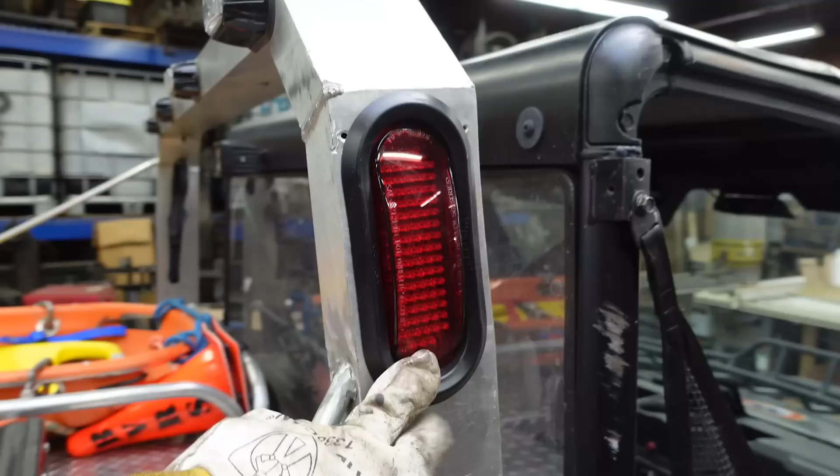All right, so here we are, day 1 on the UTV roll cage project. And I'm gonna start with a little disassembly and some tear down, pull all the stuff off the back of this thing, remove the placards that I need to, start working on pulling the lights out of the rear bar here. We gotta pull these top 4 flashers out and these side flashers out of here. And we'll chase the wiring, all the wiring goes over there to that side. And then we'll cut some stuff off and grind it smooth.

We gotta cut all this off here. This is already coming off because they hit up here with a tree. So that'll come off. The middle divider here is gonna stay, but everything else is gonna come off. This side rail here is gonna come off. And we will make an angle that sits here that will allow our steel cage to interface with the aluminum box because it's got to bolt together - you can't weld aluminum to steel. So yeah, here we go, we're gonna start with some disassembly.

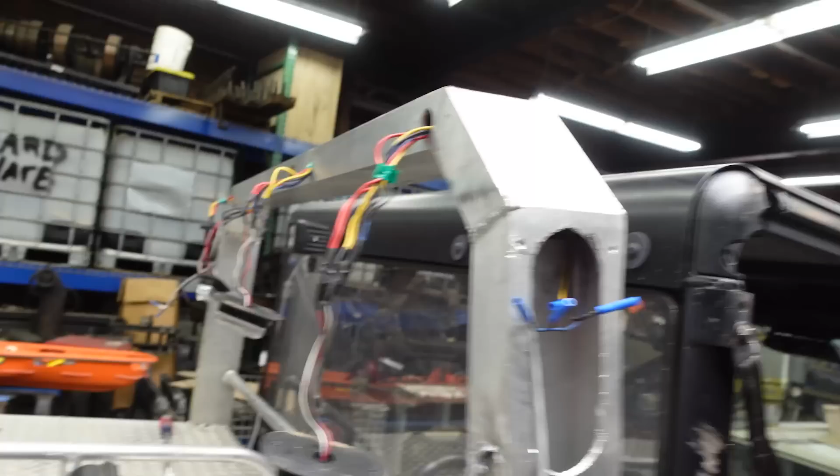Got the lights pulled out. Everything was crimped and or soldered, so I'm gonna have to cut these wires and then solder them back together later, it's no big deal. We've got a circuit that runs these side flashers, and then we've got a circuit that runs these rear flashers. Looks like they were ready to add another light here, but they didn't. No grommet to protect the edge of these sharp holes, so that's interesting - this is how they did it. But we'll get the lights yanked out and coiled up over there, and then we'll cut this thing off.

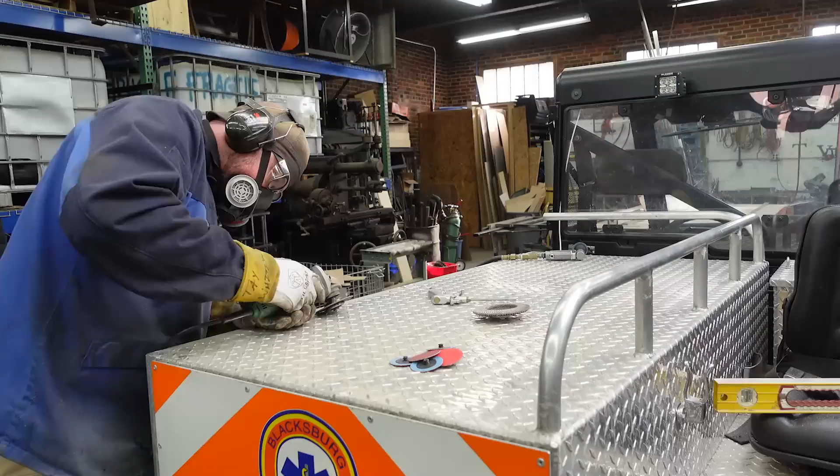So I found some 2-inch angle in the rack, and this is the plan as of yet. This one actually fits perfect, I don't even have to cut it. But because there's doors right here, we're gonna let this angle sit up like that, leaving this web of the angle here versus just doing a flat bar. We'll add some strength, and this is where the stretcher slides, so if anything it can maybe act as a guide as the stretcher slides in here.

So that'll be nice, and then our tubes for the cage will sit here and be welded right there. On this side we don't have compartments, so we can flip the angle down and weld our tubes here. And these angles will be bolted to the box, so we'll through bolt in a few locations, and that will give us a steel base that we can start fabricating our steel cage from.

But yeah, everything's stripped down, got all the old stuff off. Looks good. This guy here was welded to the upright, so we're gonna use one of those bends and cut this back and return it back down to the bed here, because this is where they clip on the top of the basket here. So this has to stay.

We'll just take that elbow and kill it right here, cut this back. I'll probably do that first while there's nothing in the way. But I'm gonna clean these guys up. I'm gonna weld shut the holes that are here from whatever this was used for last, and then figure out where to make our holes for bolting. Figure out if we're gonna have an issue in here. Nah, we'd be all right, there's enough space for a bolt to live in there.

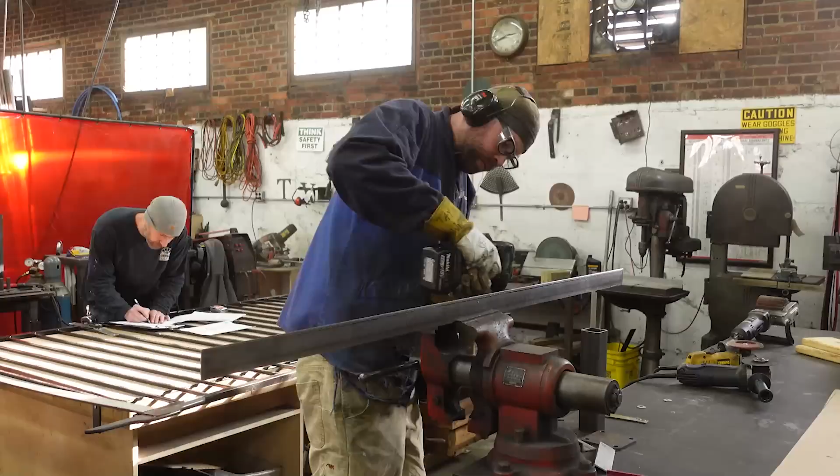So there are base plates. Just went ahead and did a nice little chamfer at the end, clean it up. That one's gonna live there, and then this one's gonna live right here. Cut it to contour match that slope, wire wheeled it, cleaned it up. It's ready to weld to.

Pretty close getting these on. Once these are on, it's time to shift gears and do some tube bending, start laying out our main hoop. Good progress, slow but sure, want to get everything right the first time.

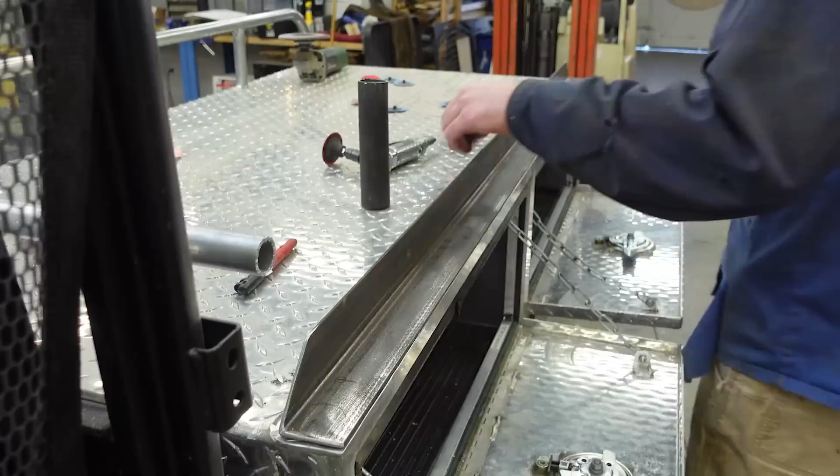Okay, quick update. The end of the day, it's a Friday, so I'm probably done here, but it's what we got. So we got 2-inch angle bolted to both sides. This side, the angle's up. I had to push these fasteners back from the midline because I had to dodge some stuff that's under here, but I got all 6 of the fasteners to connect and be bolted down. So this is for sure not going anywhere. They might as well consider that part of the structure now.

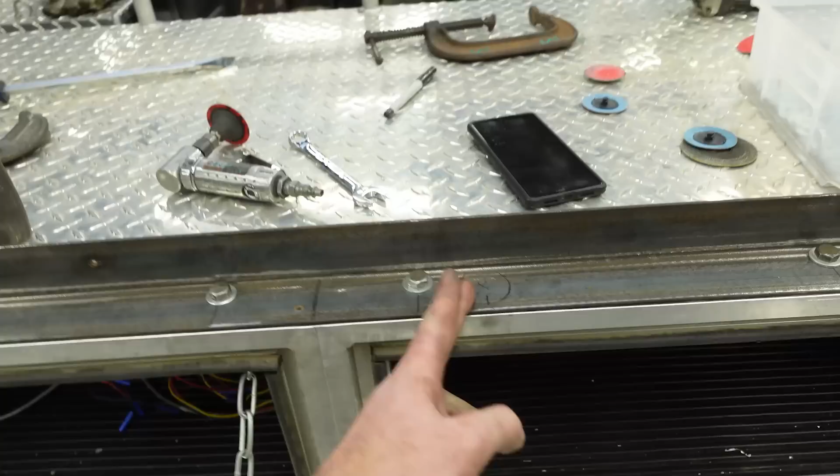And so I'll have the front hoop is gonna be here, and then 36 inches back, the rear hoop's gonna be here, and those are 2 main hoops like you would have in a normal car roll cage. And then here's an intermediate vertical that'll be solid panel here, expanded metal over here. So I got all that mapped out, everything's looking good.

And then on this side, we got the same deal. We got 3 bolts in the top, 2 bolts in the side. The angle is down because I didn't have anything in my way. And we'll have the rear hoop here and the front hoop here. So now I've got a steel foundation onto which I can build my steel roll cage that all bolts to the aluminum bed. You can't really see a difference right now, but that was a lot of valuable prep work.

So now we can just start motoring. Next week, I will be mapping out my hoops, setting up my bender, and hopefully not wasting a bunch of material bending it wrong. But I have yet to do a main hoop. I've done 2 roll cages, but I bent everything except the main hoops because I got those pre-bent. I know how to do it, I know the math, I know how to measure it. I've just never done it.

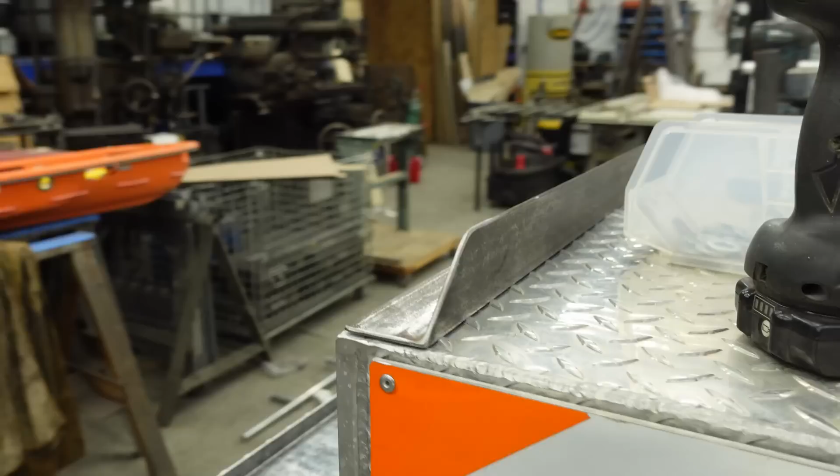All right, hello everyone. Update on the UTV roll cage build before I get stuck into it here and start bending some tube. I've got a few things to figure out.

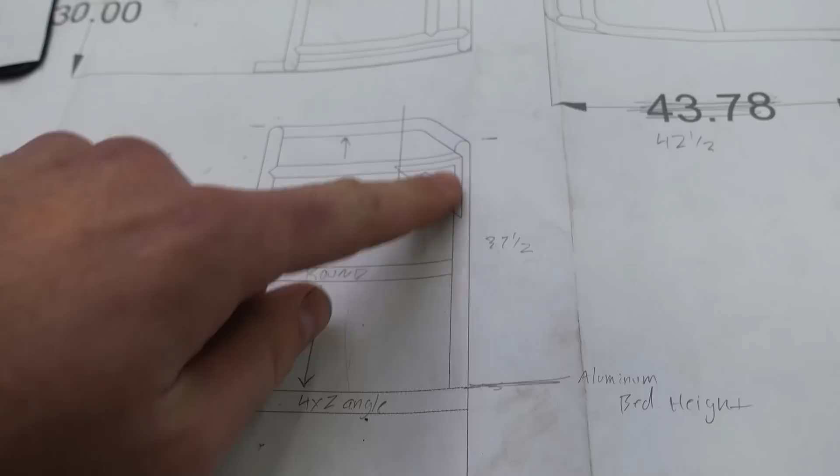So we'll have our front hoop here. If you imagine the cab's right here, the front hoop's here, and then the top bars go up and back to a taller rear hoop.

I think geometry-wise, I'm gonna do the same, just the rear hoop will have longer legs. But we're not gonna do a perfect square. We're gonna do like an 80-degree bend here, and then it'll be slanted until about here, and then it'll do the rest of the 10 degrees and come back in, which is sort of pictured here. You can see how it comes down, it's still slanted, and then a little bend here that straightens out the leg.

That is to keep the top corners of the cage inside the boundaries of the cab, because with the last one, they were having issues where these corners were sticking out past, and when they're going through the woods, trees and things, you can see rub marks and everything. Tree branches would be going down here, and then they'd catch the main hoop. So we're gonna keep the main hoop inside the footprint of the cab here.

This is a trick I learned from Justin over at the Fabrication series on YouTube: put tape at critical points on your chassis to mark. It helps you measure things out.

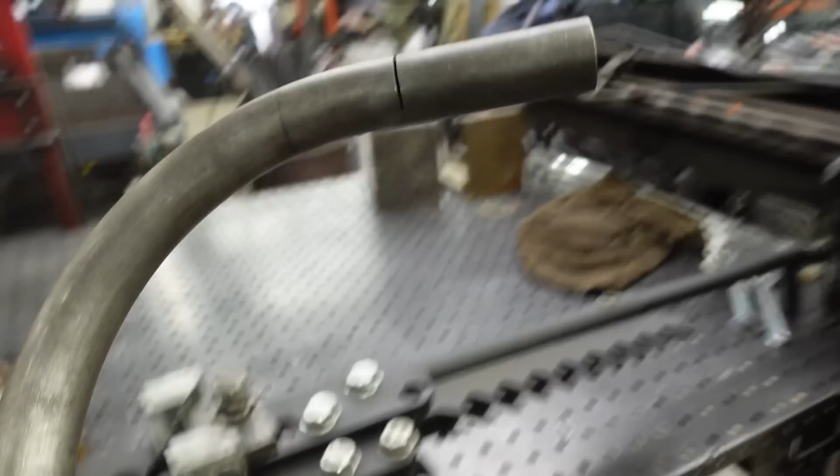I'm using a JD Squared Model 32 tube bender today. I've got my 1.5 inch die loaded up. It's like a 6.5 inch centerline radius. A long time ago, I bent this 90 with this die, and I marked that cut right there corresponds to the front edge of this die, which is a nice measuring spot.

So the reason I did that is I can take this 90 and hold it up to sort of simulate where I want my bends to be, and I can transfer a mark from that line to the chassis, and now I know where to measure, where my bend stops and the straight starts. That's essentially what that line is illustrating for me.

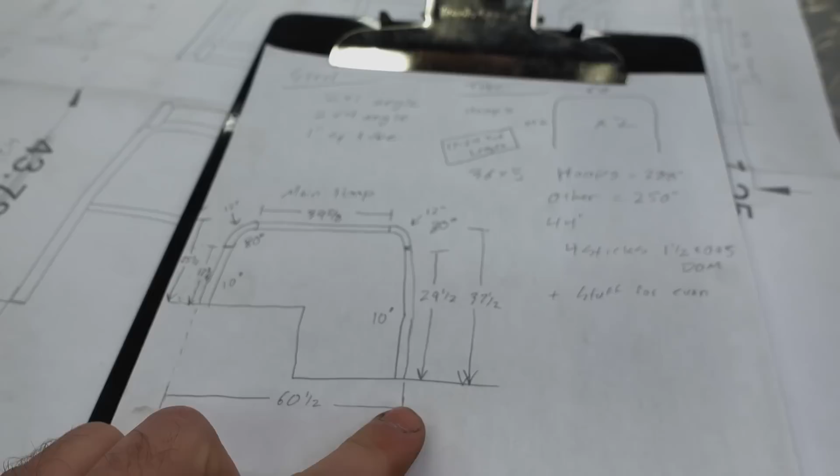The easiest way to do a main hoop is to start from the center and work out symmetrically. So when I cut some of my raw material, I'll work up a total raw cut length based on all these measurements. And then I'll start in the middle and bend outward like this. You make this bend straight, make this bend.

I fully realize that this is a lot of information, so I'm trying to give you the technicals if you're curious about the technicals. At the risk of over-explaining things, I'm gonna get started. I'll try to explain as I go. But really, figure out your raw length, mark your midpoint, all your bend locations, and then just start bending incrementally. Leave a little extra on the ends so you can trim it and fit.

I did a bunch of measuring yesterday. I think I'm ready to start cutting. I may go lay something out in CAD real quick just for peace of mind, but that will only take like 20 minutes. Let's do a few more double checks and then we're gonna get to cutting.

So there is software out there specifically for designing roll cages. I believe it's called BendTech, but I just want to do a 2D layout just to double check some things. So I'm gonna fire up Fusion and just do a 2D drawing of this here.

Just establish some constants and make sure my angles and everything makes sense. I know my bend radius and all that, so we will see. It's a 6.5 inch centerline radius, and I've got some measurements here. This is my roof line here, and this is the bed down here. And now I'm making my roof line.

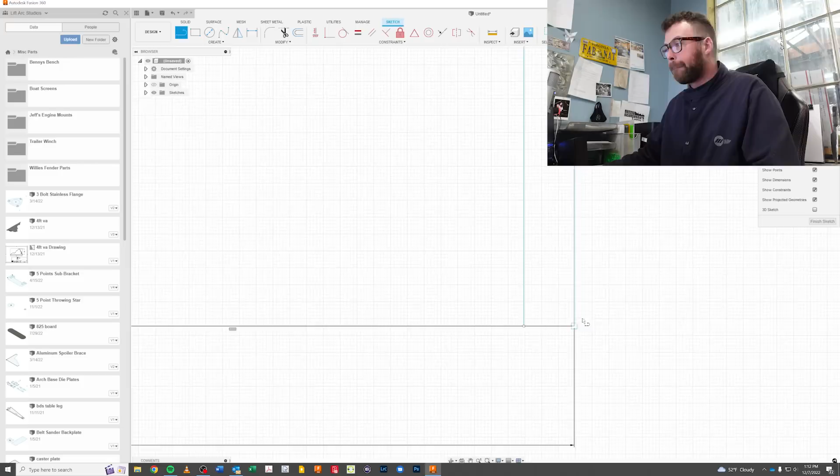So now we can establish our boundaries. Just going in here and assigning some dimensions. So it looks like we want this to be 90. So with these two angles, it shows us what we need to do. As long as from the top horizontal to the side piece equals 90, we can divide that in two pieces however we want.

We could do an 85-degree bend and then a 5-degree bend. We could do a 90 and a 10. I'm kind of leaning more towards a 90 and a 10, but I think I'm gonna lay this out on the table and see, mark my straights, something of that sort. The one thing this doesn't exactly help with is start of my bends and end of my bends, but I can translate that somehow.

So I'm gonna print this out. I'm just trying to be extra careful because this is the first main hoop I've built from scratch, and I want to get it right. I'm trying to use all the knowledge I've soaked up on YouTube and from other people, think it all the way through. So let's go back out in the shop and do some more thinking.

All right, so here's where we're at. A lot of thinking, and now I gotta download this thinking into you guys.

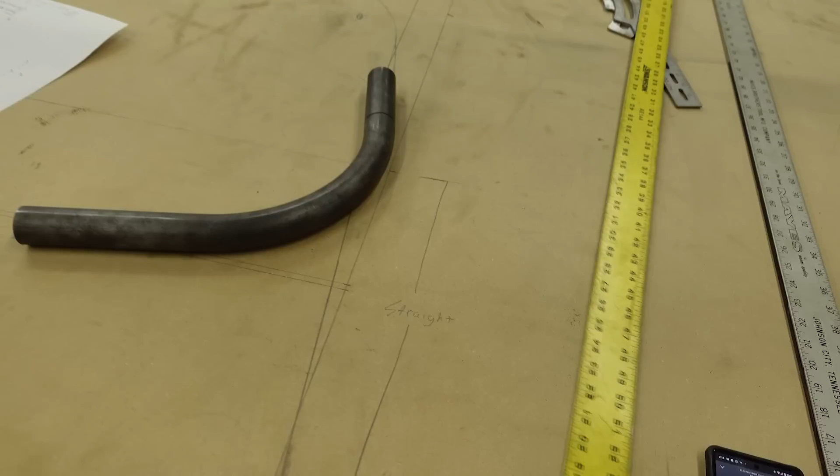So I've mapped out my limits, so I know how high the vertical height is that I can't go past, and then where my top corners are gonna be. I measured the top width of the cab because I don't want my corners to poke out past that. So we establish our constraints first.

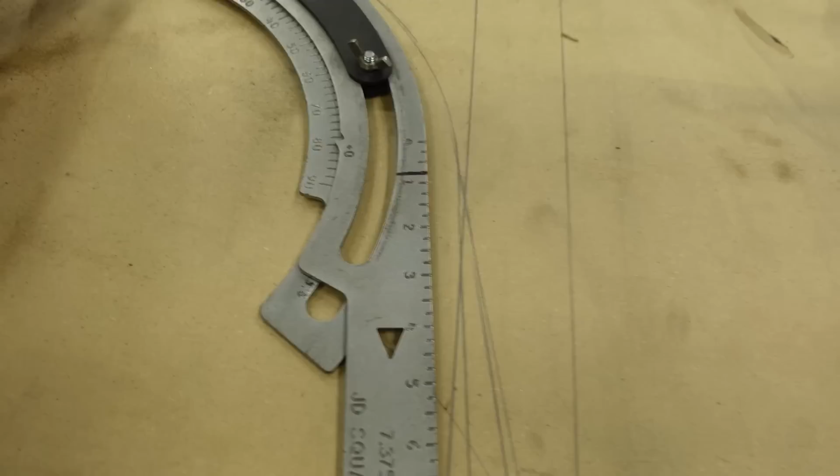Then using this bendicator, clever name for this tool, also by JD Squared. This bendicator is matched with my die on my bender over there. I've marked out where my bend starts are based on this mark here, and I can use this to play with the angle and see where it's gonna telegraph my tubes.

So I want it to be within a certain width up top, but I want it to get wider down here, and I mapped out where I want it to land. So I can use this guy to put my corner in the right spot, but based on the angle, it'll push this leg in different spots, and I can see where that makes the tube end up.

So essentially, I've landed on 80-degree bends here. I know where my start of the bends are, and I know where my midpoint is. So I'm gonna cut a rough piece of tubing, mark my midpoint, make two 80-degree bends this way and that way, and then I'll lay it up on here and double check everything before I commit to the 10-degree bends that will be down here, because 80 plus 10 equals 90, and that'll get me where I need it to be down here. That makes sense?

You follow, Steve? Oh yeah. Oh yeah. 80 plus 90. 80 plus 10 equals 90. Don't do that to me.

Okay, so I'm gonna go calculate a rough cut length for my raw material based on my 3 legs, and then I'm gonna cut it long, and then we'll start bending.

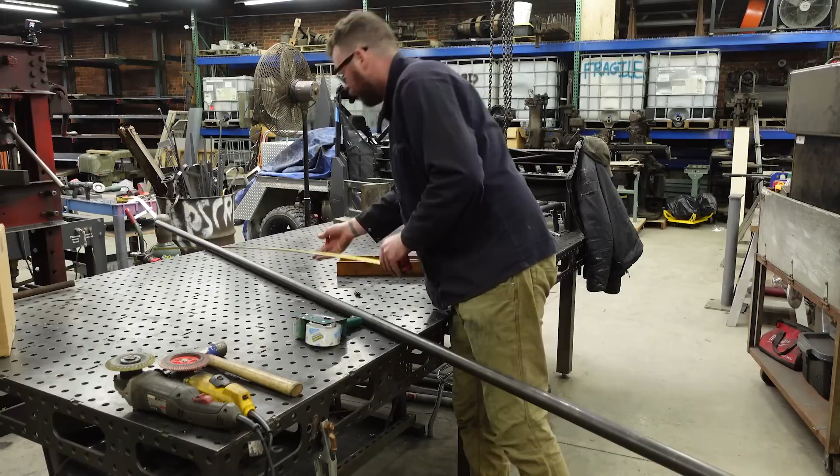All right, so now we gotta lay out our pipe. So I'm gonna find the midpoint first. Now from that midpoint, I measure out to the start of my bend. So I need to figure out what that is based on my template. So 19 3/4 is the distance from the midpoint to the start of the bend. So I'm gonna mark that now.

All right, so we're ready to bend. First bend. Let's see how wrong it can go.

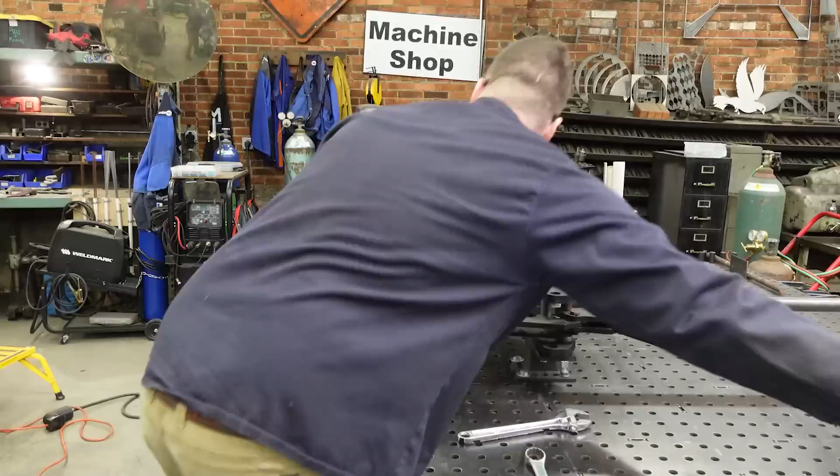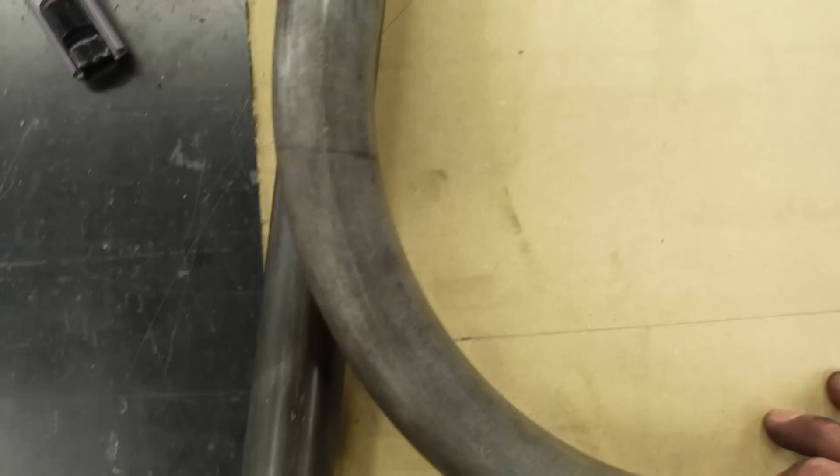All right, so here's this 80 degrees. So what Steve and I were just talking about is, it's gonna be near impossible to show, but essentially the edge of that wooden board is my outer bounds. So really, I'm gonna keep this straight section parallel with the pipe below it and ride it up the pipe like so until the gap between my elbow and the edge of the wood is what I want. There it's touching, on up, there's a little less. So I'm gonna shoot for 1/2 inch on each side to bring it in. I think that'll work.

All right, so we're close enough for the job at hand. So I'm gonna cut my legs down now. This one's gonna get cut here, and this one's gonna get cut here. And then we'll go test fit it, and then one hoop done. Took a while, but I wanted to be really careful. I have a lot more confidence now going into this, and the second one should happen a lot faster.

Another day, another dollar. We got the second tube bent up, at least the initial, and now I'm mapping out the second bend to bring the 85 degrees around to the 90. So we just need 2 5-degree bends lower.

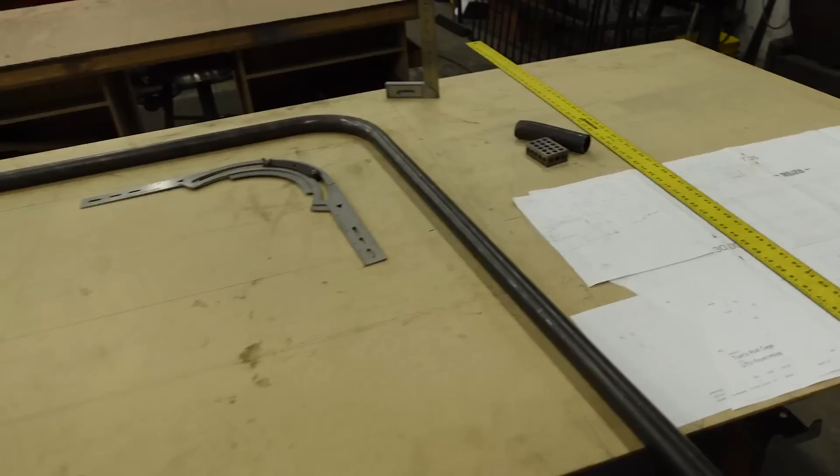This one's been a little tough to get right in its own way because the way these are drawn, you have the low hoop and the high hoop, and the slanted members occupy the same plane. So I had to extend the lines here on up so you can see where the old tube was and where this one is, and this diagonal is on the same plane. So now I'm just trying to figure out where to make that bend so that it can line up sort of with the other one.

But yeah, just doing a little more thinking, and then 2 more bends, and then we'll mock this one up on the UTV.

Once the main hoops are in, the rest gets a lot easier because we're just cutting pipes, notching pipes. Most of them are straight connector pieces, except for the top ones, which have a curve, going straight and then curving down to be notched. But there's only 3 of those, and that's pretty easy to figure out.

Because then we've got straight here, straight here, straight, straight, straight, straight. So we're good. I've got the material ordered, the expanded metal ordered, that'll be here tomorrow. The 1-inch tube is ordered too, and mounting all the lights will just be a matter of making tabs and brackets, cutting them out on the plasma cutter and fitting them. So let's finish this tube, enough talking, let's do it.

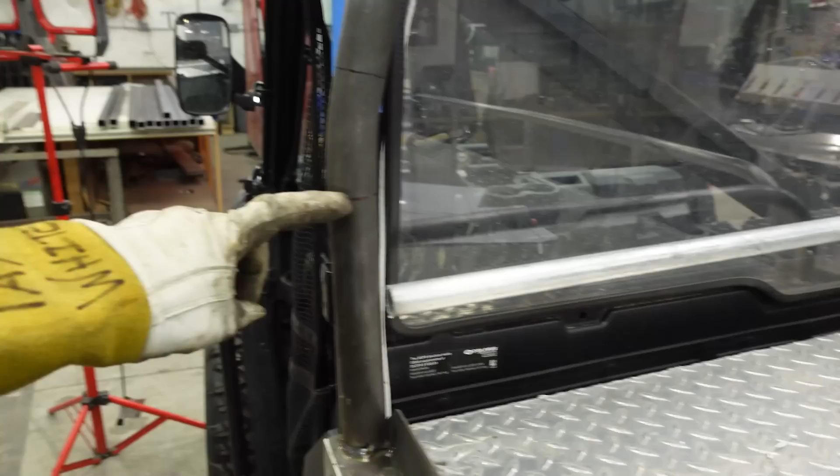So we might be in a little bit of trouble because it's kind of hard to figure out. I'm sure a bunch of you watching already know what's wrong with this. We've got this sort of double curve, right? On the front hoop we've got an 80-degree curve and then the remaining 10 degrees. And I made sure this part stays straight because of how this basket needs to fit in, 7 1/4 inches up. So I wanted this all to be straight.

This back hoop is taller, right? So the bends aren't gonna happen in the right place. I thought I'd mapped this out correctly, but if you look, that bend and that bend don't happen in the same place, and that's completely my fault. This bend starts 12 1/4 up. This bend starts 7 1/2 up.

So now I'm at a crossroads — do I deal with this? Do I leave it, or do I make another hoop? I've got 2 more bars, and I think I'll still have plenty of material to do all my connectors. This is why main hoops scare me, because it's a lot of material, and if you get it wrong, it's kind of trash. Hopefully I'm not wasting a bunch of material bending it wrong, although I'll be able to reuse that top straight section and whatnot.

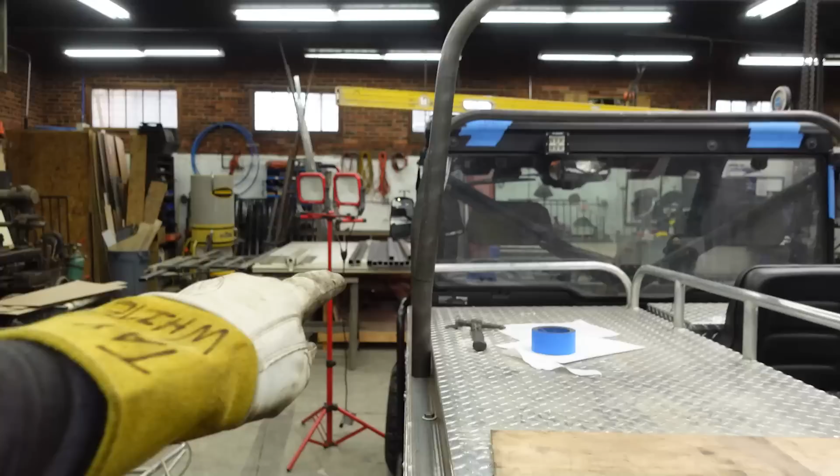So I either rebend the back one or cut the front one off and rebend that. I guess it depends on bend position. I think I'd rather have the first 8 1/2 inches straight versus this one. So unfortunately, I think I'm gonna have to remake that, just because I want these bends to be at the same height, and I gotta figure out what I did wrong.

We're gonna have connecting pieces running forward and back, therefore these things need to be sitting at the same angle. How do I get the rear hoop to have the same geometry as the front hoop, but sit higher like this one does? I'm gonna need to think on this. My brain kind of hurts, and with the camera rolling I don't have full access to my thoughts, so I'm gonna cut you guys out for a bit.

I think I know where I messed up. On the front hoop, those bends are 85 degrees. The rear one, they're 80 — because by extending this up, I thought I needed... sorry, it's 80 on the front, and these back ones were 85. I thought I needed less flare out because this thing's taller. But what I need to do is actually do the rear bar just like the front, so 80 in the corners and 10 down here.

To make it taller, the straight section in between these 2 bends is where I get my height. And as I increase this straight distance, the flat horizontal needs to shrink, because as these telegraph up at 2 different angles, the bends become closer together. So I think that's the move — essentially remake the front bar. I'm gonna go draw this in CAD again, since I've already drawn the front bar, and I just need to raise the height a certain amount, gained from those straight sections, and then this top horizontal will shrink to account for everything moving up. That way, these subtle bends will be in the same place, which is important because we've got horizontal pieces going across here.

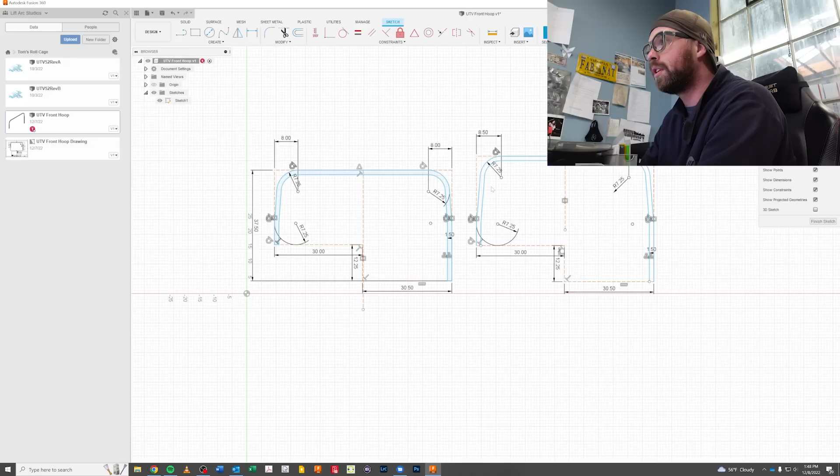What I was curious to see, I kind of guessed. So over here, I inset these circles 8 inches, these 7 1/4 radius circles, from this sample box to achieve that sort of slope that we're after. So over here, I was guessing we want the bends at this location to be the same height, which they are, and we want the angle of this member here to be the same as this one here.

If I measure the original one, we have a 94-degree angle, but over here we have 94.6, so it's close enough. So what this tells me, roughly, as far as the dimensions go - I'm thinking this through as I present it to you, and maybe I should have thought it through more before presenting, but this is the reality.

So essentially, I've pushed these bends here closer, an inch closer together, in order to account for the fact that by extending this straight member, this top piece needs to shrink. So by the way I've dimensioned these compared to this side, I've lost an inch off the top. I wonder if I change this now, will everything go with it? Yeah, so I think that should work.

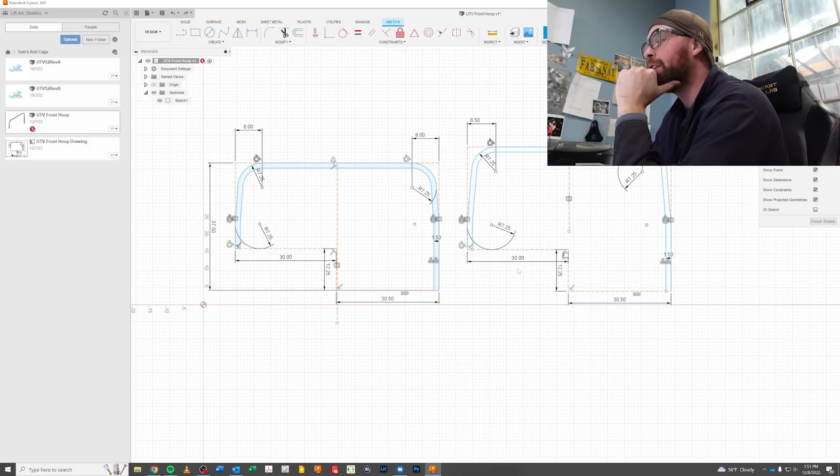So really, if I do the exact same thing I did for this, but shrink this horizontal member by 1 inch and then lay it on there and telegraph everything that way, I should be good. I hope that made sense to you - it barely makes sense to me, but I'm working my way through this. If I do more of this, it might be worth investing in bending CAD software or just being better. So I'm gonna let this marinate and stare at it for a little longer, and we'll go back out in the shop and put the plan into action.

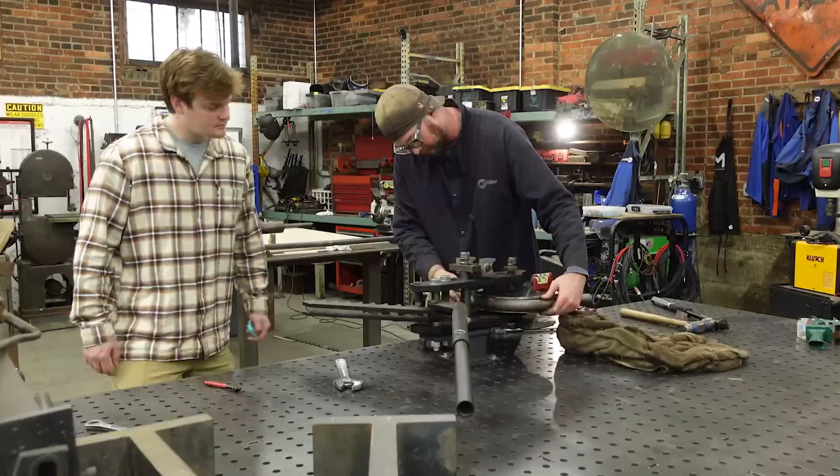Everybody, here we are. My buddy Jake Freeland is over here at the shop. You'll be seeing more of him - he's gonna come do some work out of this shop for his business, Freeland Welding, and we're joining forces. But anyway, he's here hanging out. You don't have anything better to do, I guess. No. But so here we are.

We've tested the rear bar, and I'm much happier with this one. You can see the bends are in the same place, left and right, and we're 5 inches taller. It's level, and the space between the front and rear bar is the same no matter where you measure it. So everything's tacked in, super pleased, and now I can start working on horizontals.

I think the next hardest thing to do is gonna be the top bars, which are this shape - straight and then a bend down. I gotta map that out somehow. But that's what's next.

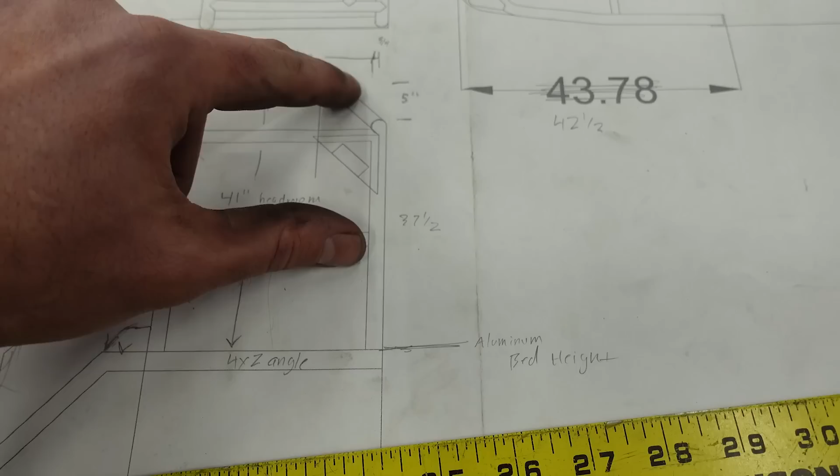All right, here's what we did to bring you guys along. Again, we're making this roof section here where the bar is straight for a bit and then a 45-degree bend, and then it comes in and bird's mouths into the front hoop and the rear hoop. So what I did was draw this in real time.

So we located one tube here, 5 inches up, and then one tube here, essentially a 0 point. We will have our tube go straight, and then using the bendicator, we figured that this was a 45-degree angle, so we set this at 45 and essentially put this on our tube line and situated it to where it intersects with the other tube we drew.

So then we have 25 and a half inches of straight, and then our bend happens right there. We bend at 45, and then the rest of it runs into here, and we trim it and notch it. Make sense? Sorry if it doesn't. Watch how we do it.

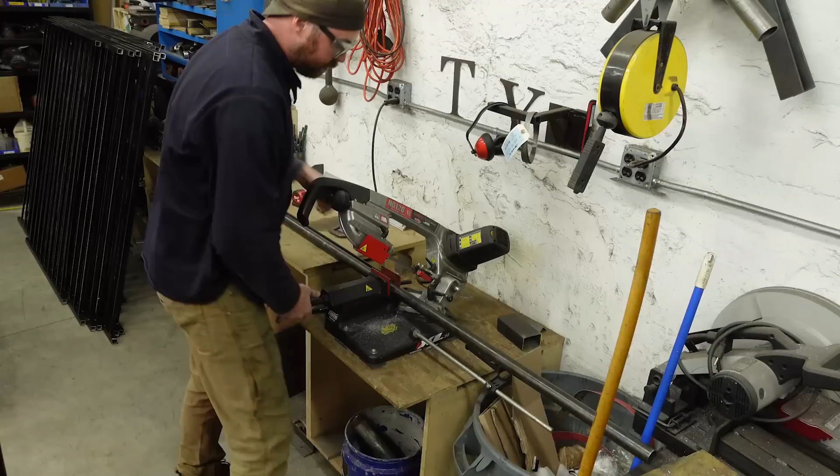Notch master from JD Squared.

So now we pretty much line this up to where it's halfway across the bit, and then we go to town. And there you go, a perfectly coped tube. Right tool for the right job.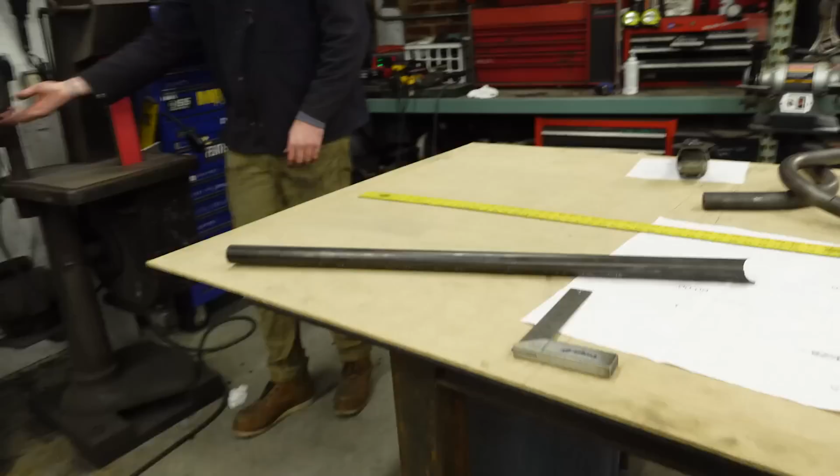When you're filming Tay, you have to lift your arm up high. Close enough.

Okay. Tension, make sure we're at 0. Let's start cruising.

Hope I don't run out of pipe. 45 degrees. All things being equal, should be able to set it in here, lower it down. We're actually a little past it, which is fine. That means I can just re-drill that and bring it back here.

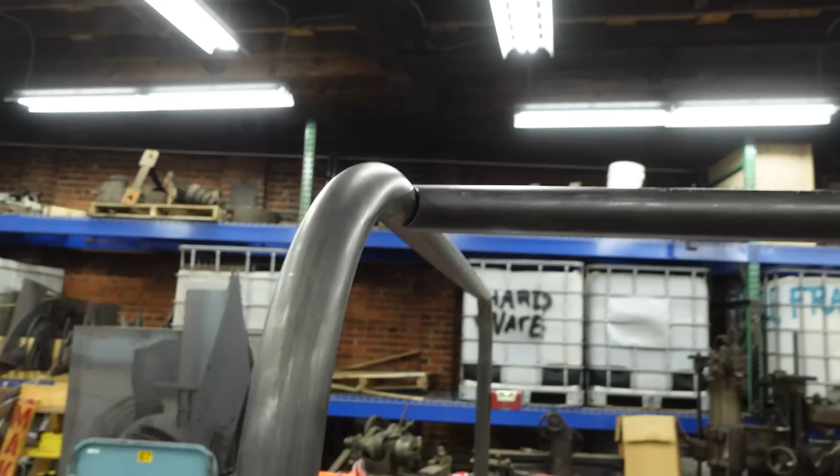All right, and there's the result of all that math. Fits great. It's a hair short, but it could be that this tube is just out. So very pleased with that. All the geometry looks like it should.

And there's gonna be 3 of those, so those will snap up quick. Yeah, now this thing's really starting to take shape, really starting to look like a cage. The back hoop fits great, looks really good, looks the same as the front hoop. Very, very pleased with this.

So I know I keep saying this, but tomorrow this thing is gonna take shape. All the parts, the rest of the metal shows up. All the hard stuff now is done, so we're gonna start welding some tubes together tomorrow. Yeehaw, see you then.

Quick update before the battery dies here. Got the 3 roof bars tacked in. We got all our base of the main hoops welded fully, and I'm very pleased with how it looks. It looks good from the front, looks good from the back. No glaring issues yet. Everything's vertical that should be vertical, square that should be square.

So now I'm gonna do 2 horizontal bars this way. We'll do a low bar, split one in the middle. Yeah, this thing's coming together.

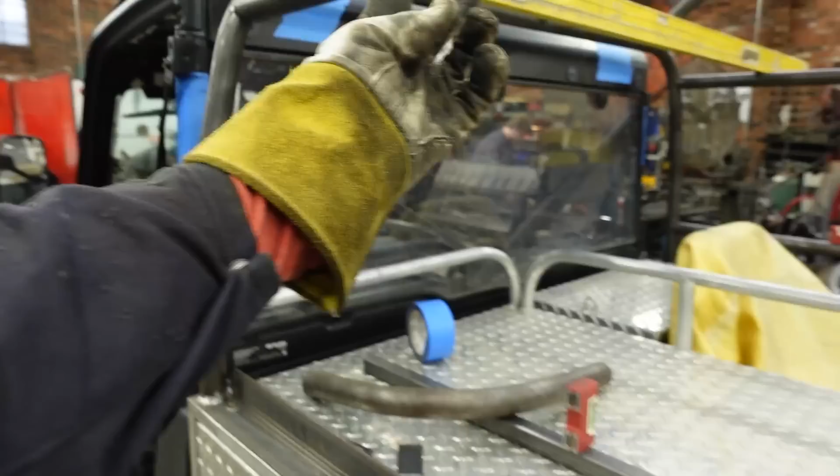Status report, we've got our 2 top horizontals mounted, and I need to make an intermediate bar here. So I'm gonna mimic this exact profile here. I left my mark on from when I originally bent it, so I know where the bend will start. So it's 9.5, 10-degree bend, whatever that is, and notch it to go around here and kill right into that.

Because we'll have expanded metal in this half and a steel plate on this half, and same over here. So actually over here, this horizontal that I have not welded in yet probably won't be there. I'm gonna have to do the same thing, one that goes down like this of sorts. So that's what I'm cutting out.

Go bend this 10 degrees.

Looking good. There's the next intermediate bar. All those bends line up and happen at the exact same place. Real satisfying. So we'll weld that one in. It'll be 2 square bars instead of this continuous length square bar.

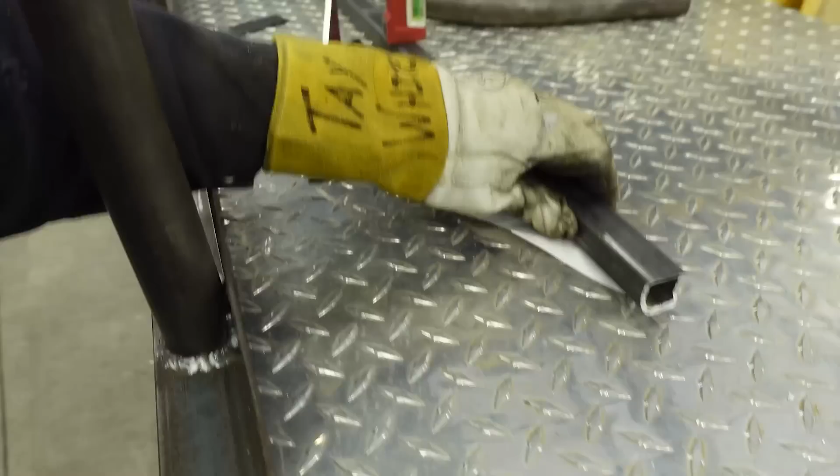There'll be now 2, so one here, one here. So I'm gonna split that one in half, mount it in here, and then this side is done and ready for plates and expanded metal.

All right, so slight change of plans. On either side of this thing, in this opening here, it'll be bifurcated, and the front half will have a solid plate in it that they will vinyl with that 6-sided EMS asterisk looking logo and some reflective tape, and then this back half will be expanded metal. So instead of this piece in here, that may go back in later, but I think the first thing I want to do is make this vertical, and then if we want a horizontal in afterwards, we can just do it in 2 halves.

I'll do what I just did on the other side, take some measurements here. We got 9 inches from the midpoint here to our beginning of the bend, and then below that I've got 24 inches.

Yeah, so we're real close to finishing up the structure of this cage here. Once the main hoops were done, the rest of it's been really fun, just sort of minor bends, mostly notching and measuring. And yeah, it looks pretty badass. It looks definitely, it's gonna be super safe and quite striking to see it all together. And once it's powder coated and everything, it'll be cool.

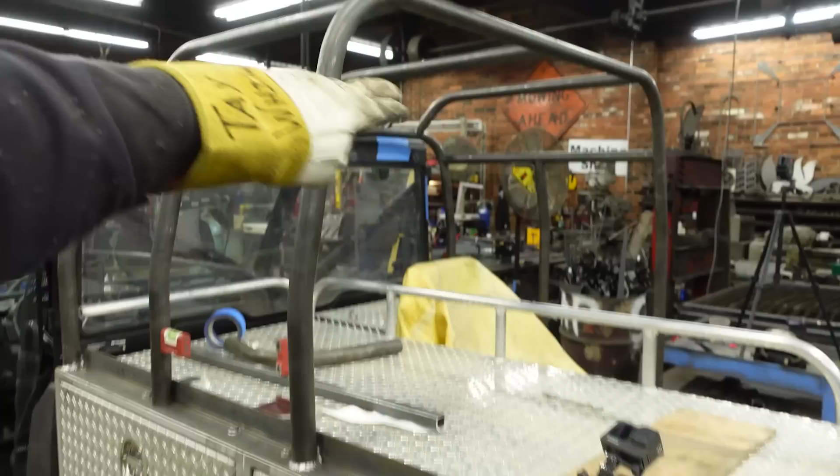We're still debating on a diagonal coming down this back area here, but other than that, it's pretty all right.

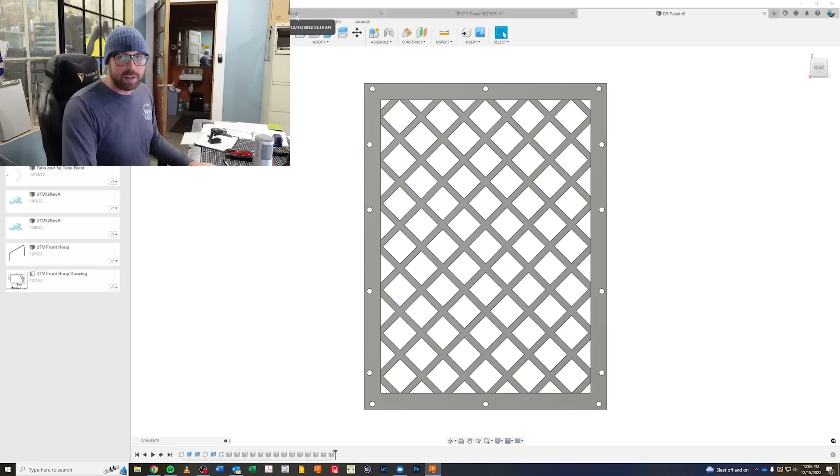Anyway, I learned a pretty cool trick in Fusion if you want to do something like this, so I'm going to do this panel with you so you can see what I've learned.

So I've measured my openings and I'm accounting for my margins now. My opening is 15.5, I subtract a half inch, that's a quarter inch on either side, so 15 wide by 32 3/8 minus a half is 31 7/8.

All right, so we've got our rectangle, that's the outer limit of the panel. Now I'm going to offset the border inward by 1 inch, and that's our margin where there's no lattice work. That's to give strength and to be where all the holes go.

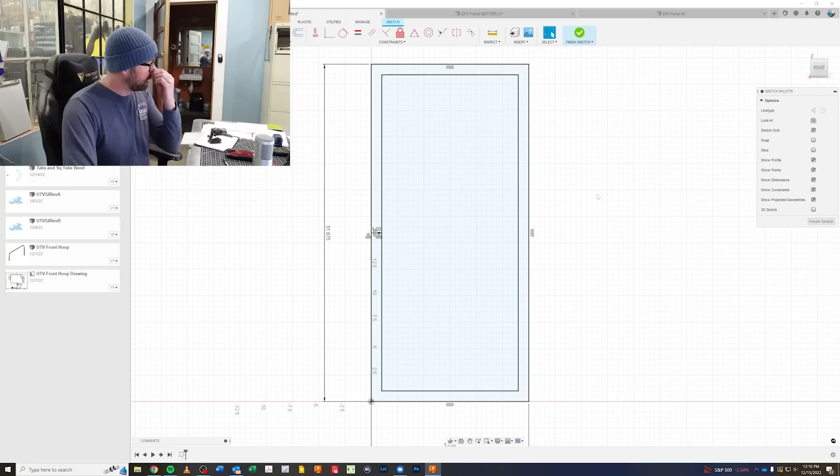We also need to plot out, this one's going to have a light in it, so I'm going to delete this line, delete this line. I'm going to make an overall slot, and I've measured my hole, the gasket here on the back of the light, and it is 6 5/8 long by

2.475 tall. Now I'm going to space that off the wall 1 inch here, and then dimension this off the wall 1 inch as well, okay? Then we'll take lines and finish our border like that.

Now we're going to offset this 0.375, or 3/8, and trim what goes outside this border here and open it up like that. So now we've got this solid piece, that's all going to be metal, and then inside of that is going to be lattice.

So here's what you do: you finish the sketch, and then you go to extrude. I extrude the outside first, this is going to be 1/8 inch metal. This isn't really relevant to the plasma cutting process, but it's how I do it in Fusion.

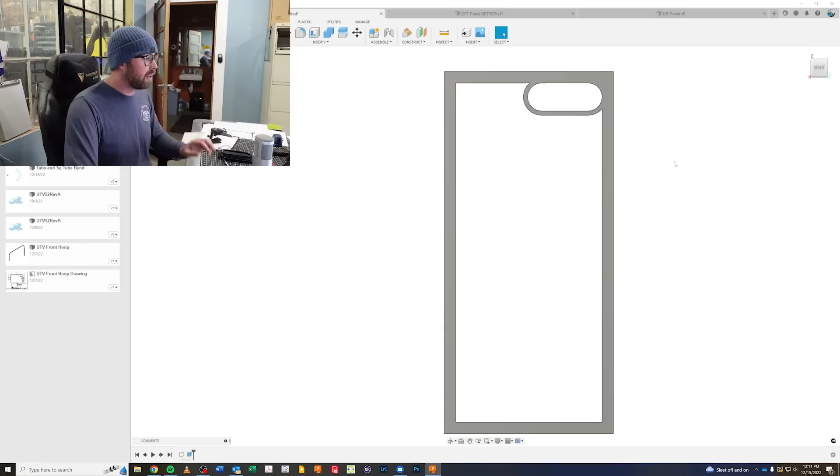So you've made an extrusion based on a sketch, so the sketch went away, so we'll make the sketch visible again. Now we'll click this interior body and extrude that as well. You want to make sure that when you extrude, I'm extruding the same thickness, but you go over here and say new body.

So now we've got 2 different bodies. It's all the same piece, but they're over here under bodies. You have body 1, which is that one, and body 2, which is that one. The reason that's important will be made apparent in a minute.

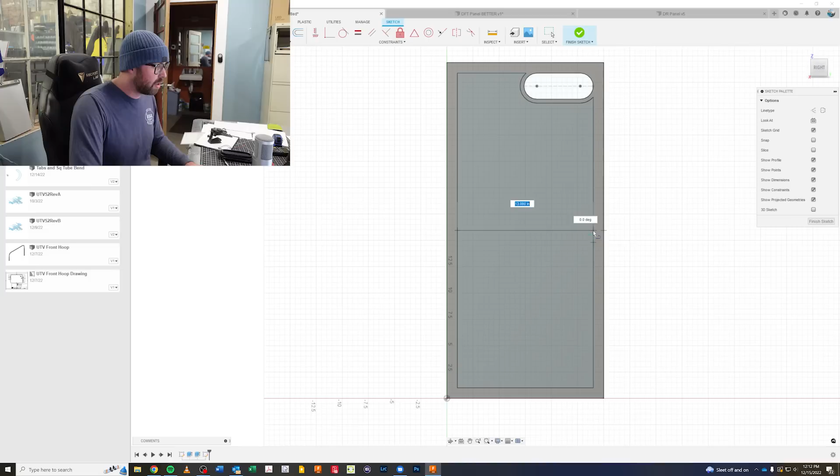So now we create a new sketch in body 2, and I'm going to center a diamond in this square. So I'm going to draw 2 lines at the midpoint, give me my center, and I'm going to create a center point rectangle that's 1.5 by 1.5. All right, I'm going to select it, go to move, and pivot it 45 degrees.

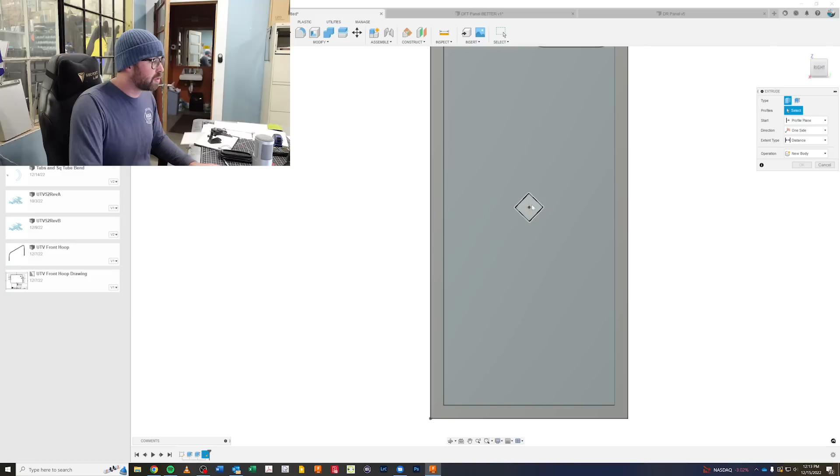Here's the crucial part: you need to make 2 lines, at least for this pattern, that will be the axis along which the pattern is created. Okay, so I've made 2 little 45-degree lines there. I'm going to finish the sketch, delete my midpoint lines, and extrude this through to cut. So I've cut my diamond hole in the middle of the panel.

Now we need to make a pattern with that extrusion, with the extruded hole, to make all the other holes. So here's where the magic happens: you go to rectangular pattern, change this to features, and now I can select a feature from the timeline. So I select the extrusion that made the cut, then I go to axes, make this sketch visible, and pick this axis and this axis.

All right, and I've measured my spacing, so you just bump the quantity up big enough that they'll go past. My spacing is 1.875, and then 20 here, and 1.875. And what that should do... symmetric spacing. Let me try that again.

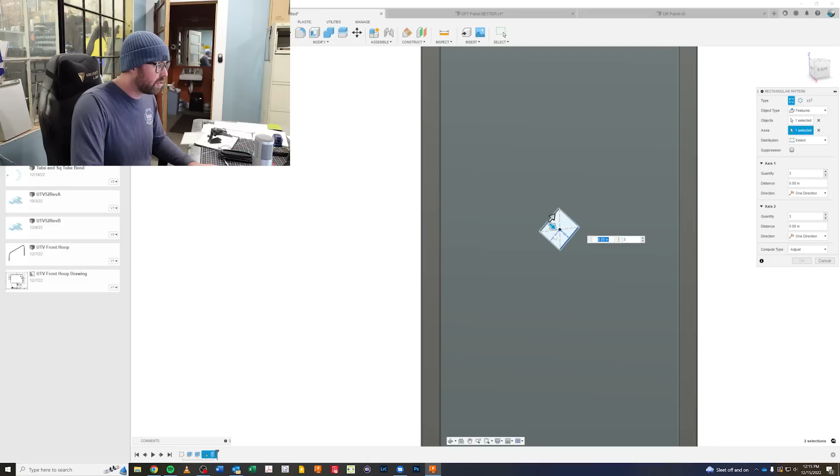Rectangular pattern, features, object is this, axes are this and this. We'll be doing spacing, 20, 1.875, 20, 1.875. And now if we do symmetric, okay? I know that looks crazy right there, but that's filling in. And watch this, when I hit OK, computing... I'm loading up my computer right now.

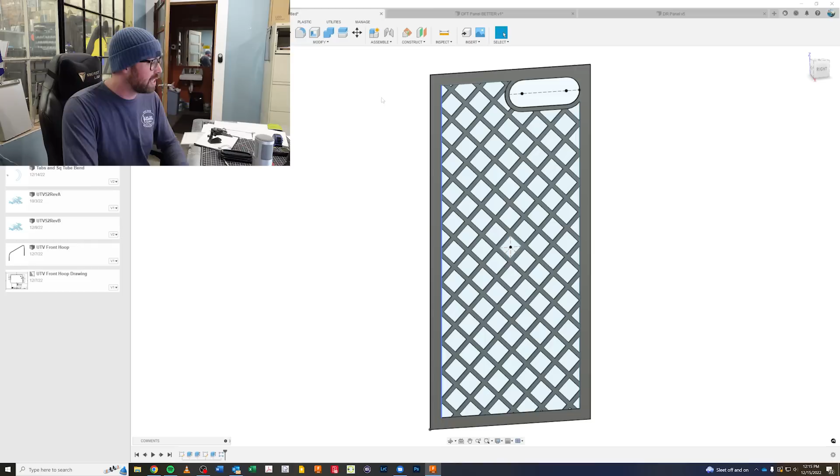Boom, look at that. Because the sketch I made that center hole with was exclusive to that second body, the interior body, the pattern I created didn't go any further than the extents of that body. How cool is that? Really stoked on that trick.

So yeah, now to turn this into a DXF, I still need to do my holes around the outside, but to turn this into a DXF, you create a sketch anywhere on this face, hit P for project, click this body, click this body, and hit OK. Essentially, that's how you can create a sketch based on a three-dimensional model that doesn't already have a sketch.

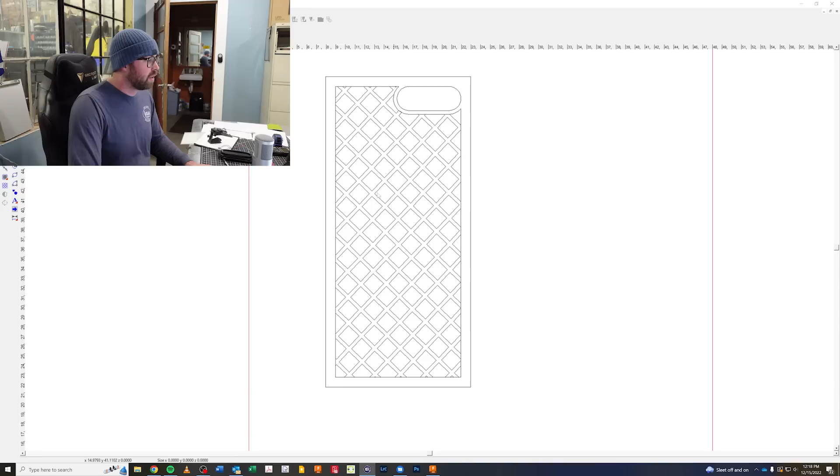And then the fundamental is, once you've created that sketch, you save it as a DXF, save, and then we'll open up our panel and look at that. This is a to-scale DXF file created from a 3-dimensional model that was created from a series of sketches and extrusion methods. So there you go.

That is how I'm going to be creating my panels for the roll cage. And like I said, I've already done a few, but that saved me a lot of time, because the very first one I did was this one, and I drew everything from scratch.

And for the bigger panel, it would have taken me an hour drawing them all manually, because it's literally 3 times the pieces. So anyway, yeah, that's where we're at.

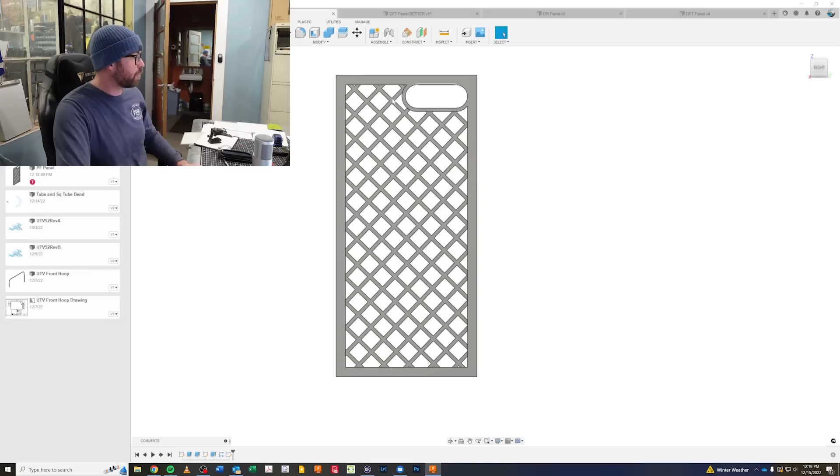So I'm gonna keep rolling on this and knock through the rest of these panels. Then we'll load some 1/8 inch steel on the cutter. We'll cut out a small panel, probably this one first because it's nice and small. And then we'll verify that my inset for the holes works with these tabs.

I just want to be able to bolt these tabs onto the panels and then hold the panel in the gap and tack the tabs where they land. I'm gonna use 1/4 inch fasteners, and my holes are 0.3, or a little under 0.3. Quarter is 0.25, so I've got a little slop, and that way these tabs can move around and find their home.

I need to order some hardware, some stainless hardware from McMaster-Carr for this and for some other things. So I'm gonna time lapse the rest of this, and then we'll throw some metal on the cutter.

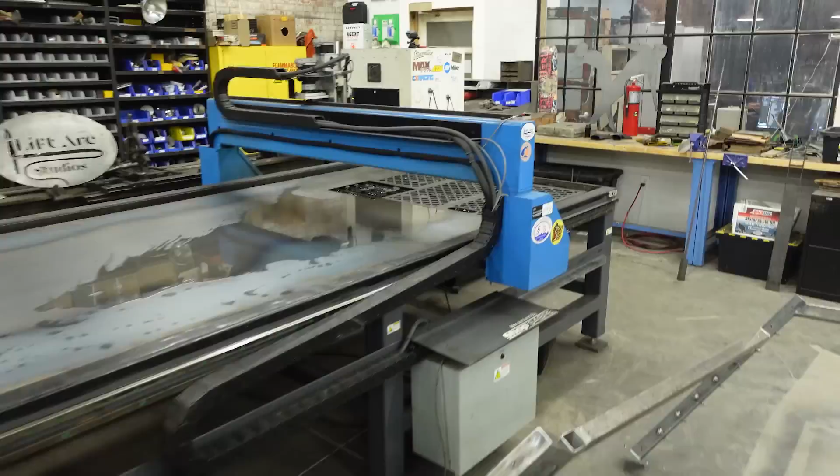We've got our panels cut, got all these over here cut out, ready to go. I gotta bend them, so where that bend in the cage happens right there, I'd like to bend all the panels to follow that contour. I don't know that we'll do that with this brake, or just put them hanging off the edge of the table, heating along a line and then pushing them over.

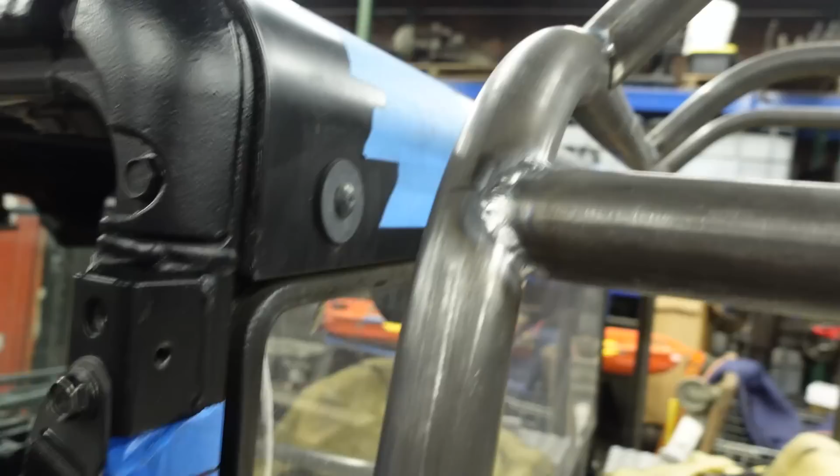But I'm using my Everlast TIG, coming over all the joints and welding them fully, trying to keep it clean. I like TIG welding pipe just because it's really satisfying, and it looks good when it's all done. So fully welding all this, and then panels go in, and then the roof panel goes on.

I think I've already probably said this to camera a few times, but I've got to make brackets for the lights, so I'll do some CAD work on Sunday and develop those. And then a shelf. There's a lot that was added - the customer added some things, added a shelf for a defibrillator, which will sit right in here this way.

Added the roof panel and added these plasma cut panels as opposed to the expanded metal that was the plan before. That's okay, change orders happen. It's more money toward the shop, but it's more work we gotta do. But it'll look really cool when it's done.

These panels are gonna be pretty trick. You can see there's a margin all around that'll be evened out, but I'm really stoked on how those came out. Hopefully my tab mounting system works out.

But anyway, I'm gonna keep welding. Just wanted to let you know, since there's a bunch of other people in the shop making noise, it's hard to pull the camera up and talk to you guys and let you know what's going on. So that's quite enough talking, let's get back to work.

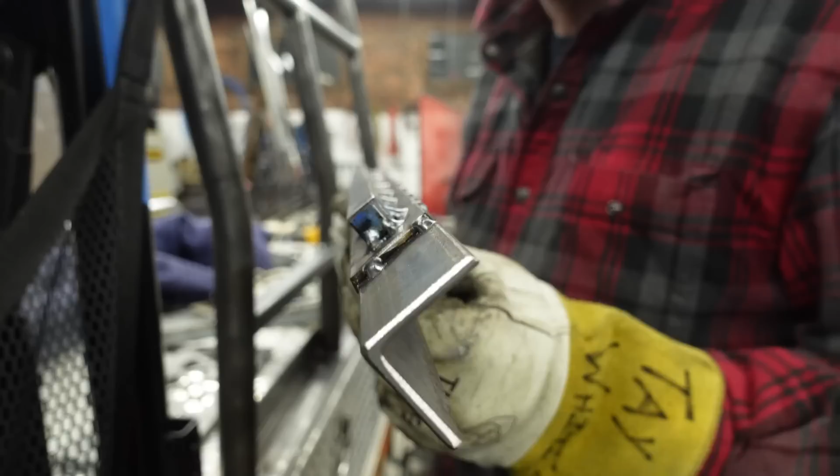So basically, 1/2 inch plus 1/8 equals 5/8, and that positions an imaginary plane right inside. So I clamp, and all my gaps are the same. If I clamp two of these bars in any location where a panel has to go, and then bump the panel up against it, it'll locate the panel perfectly. I'll get them clamped in and you can see what I'm talking about.

That will locate the panel in the right spot. And then I just gotta space it side to side. So with those pieces in, I basically push the panel up to it. You can see in here, I've got angle, 1/8 inch, 1/2 inch.

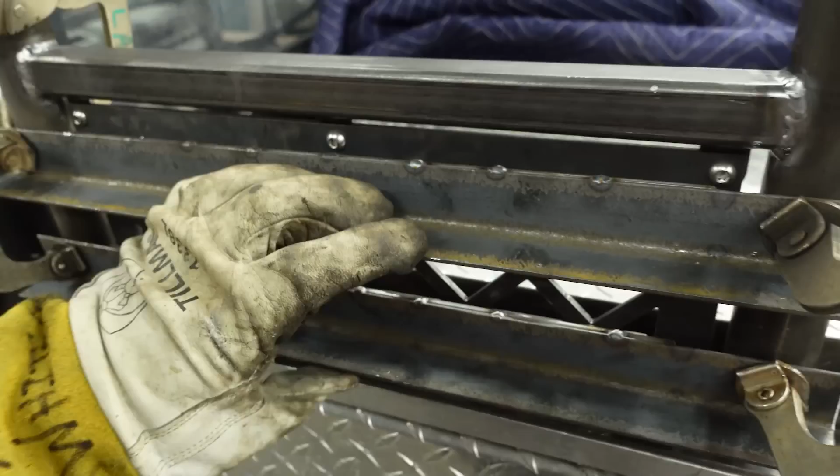Meaning I clamp these on, I push the panel up to it, and I know that panel is located directly at the midpoint or thereabouts on this tube. Now I can tack it in because on this one I've already got my tabs bolted in place. So I can tack them in and then unbolt the panel, and the tabs will still be there, located in the right spot. Make sense? Good.

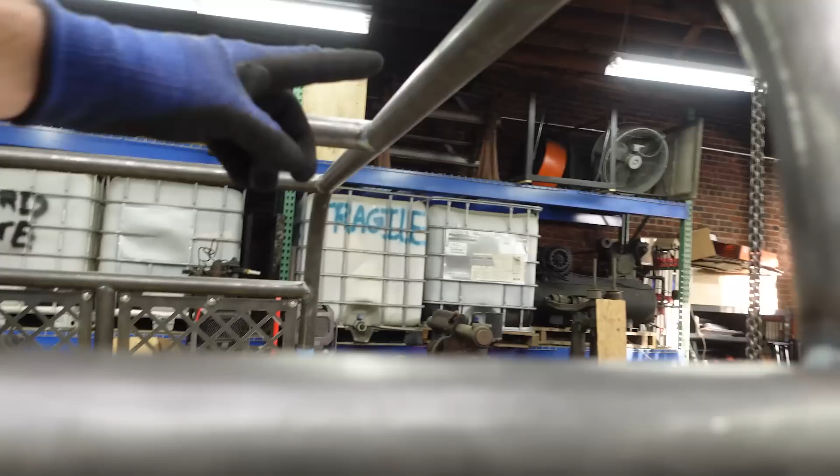I also need to weld some conduit up in here and figure out the path for all the wiring for the lights. Sounds like a lot, I guess it kind of is, but it's all right. The customer's coming tomorrow to give the final okay before it goes to the powder coater, so I want to have it finished tonight.

Oh, we also got to do some tabs to incorporate these cab mounts to the cage. So I was playing around in Fusion this morning, cutting some plates. I think I'll do something of that sort there. I've got my two bolt holes mapped out.

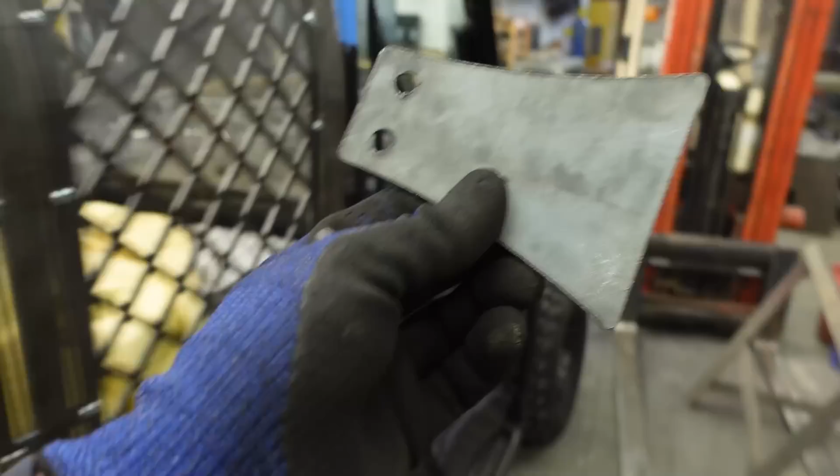So I'll just put a slight bend in that and cut this back to where it intercepts the tube like that. Do one there, one there. I'll just make the plate touch the tube by bending it. I haven't checked this side, but we're after the same thing, so that one can just be cut down so it sits flush like so, and then same thing up here.

So that's a nice size. I cut 2 of these out already. I'm gonna cut 2 more. And then that one front corner up there will have a bump out with a circle so that this carabiner on the Stokes basket has somewhere to click into. That's not gonna make sense until you see it.

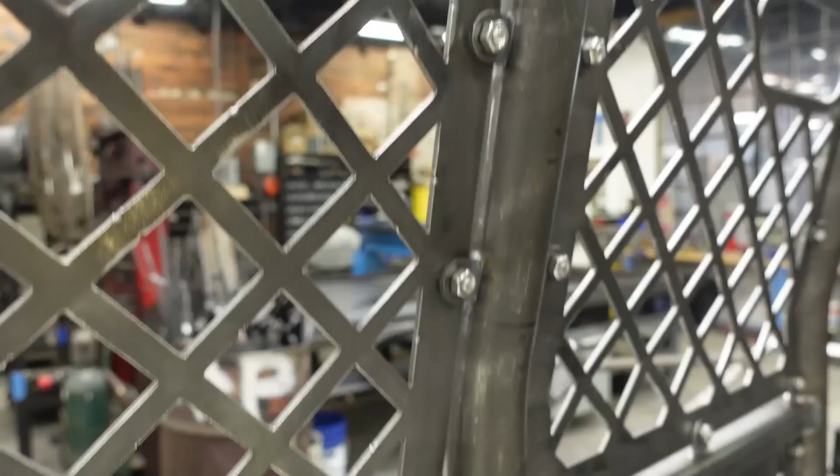So yeah, this process of bolting the tabs to the panel first, and then really wrenching them down so they don't move, and then test fitting the panel and sanding off, grinding off material from the tabs until the panel slips right in, worked really well. I got faster and faster at it as I did it, and my welds got better.

I TIG welded it, and the beauty of a TIG welder is that you can weld in really tight, confined spaces. I didn't want to weld the panel to the tube, I wanted to weld the tab to the tube, but the tab's bolted to the panel, so I only had little tiny gaps to weld in. I was running a little extra stick out, running a gas lens so I could have some stick out on my tungsten, and I could feed that right in there and get real close.

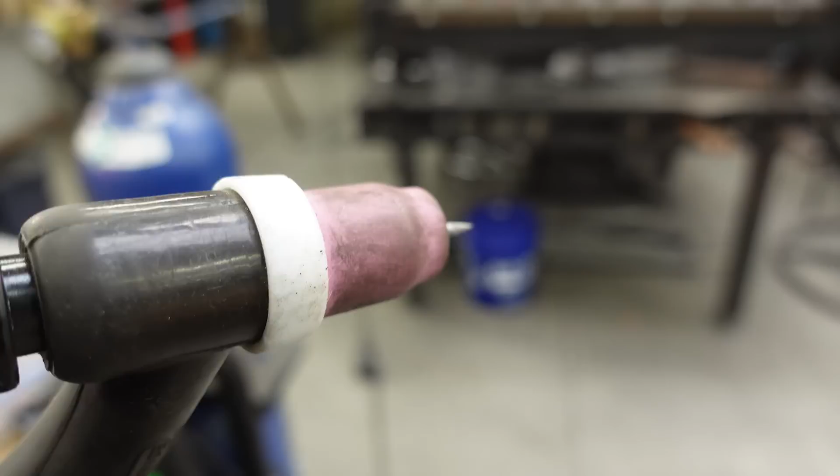So anyway, onward and upward. I think next thing I'll do is make these radiuses here. Again, just like that, but right here. So let's do that.

New welder day for Jake here at the shop. Look at that thing, pretty good too. Hell yeah, I'll make you a deal on that rack, $4.99. Okay, deal. So what do you get for your $4,500?

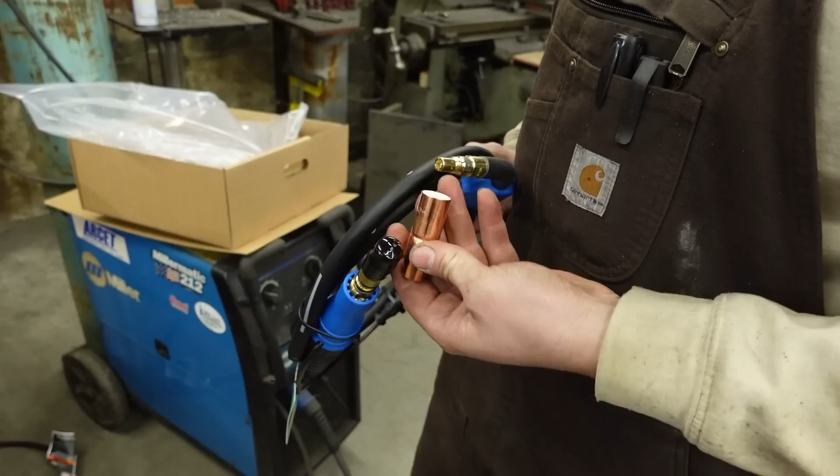You got MIG stick, AC/DC TIG. Got you a MIG gun. You're gonna go Tweco style though. The shitty new Miller, actually I'd never seen that one. That's not the same one. It doesn't look bad, it's like mine, just a little smaller. Mine's like the heavier duty one. We may have to go Tweco. We'll see, I don't know man. If it ain't broke, don't fix it. I don't know, I like Tweco so much more. You always keep that as a backup. Kind of like the ergonomics of it. Yeah, it's a little more bent. Well, it's about the same.

I've been wanting to play with one of these for a long time. I want to see if it'll do a lot of automatic thinking for you. I want to see how good it is on aluminum AC TIG. I've spent months, almost a year now, really fine tuning my settings on that machine, which is all manual. I want to see what it does when you just go 1/8 inch aluminum, this size electrode, this kind of gas. Go. And see what it comes up with. Who knows? Their 255 has the same kind of deal, but the auto set, that shit never worked.

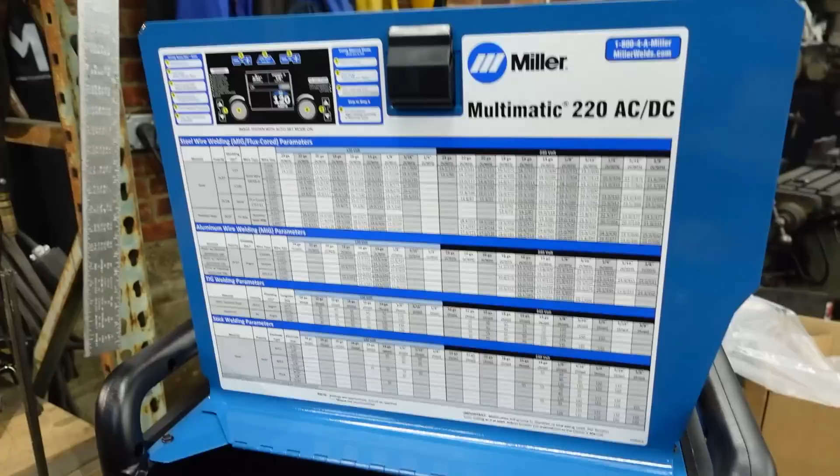Well, howdy. Oh, here it shows you how to use everything. All right, I gotta quit getting distracted. I'm gonna get back to work.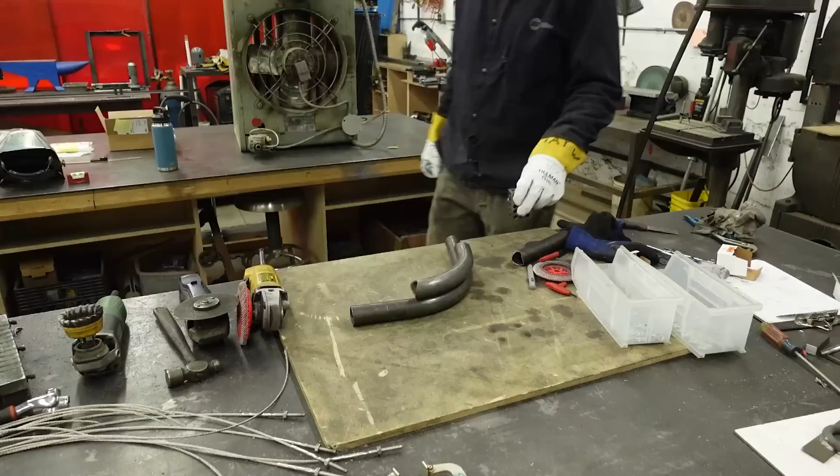It's so fucking close, just fit. Yeah, it's filming right now. Doesn't fit yet. Bleep that out, Walker. You already are.

That only took 2 hours.

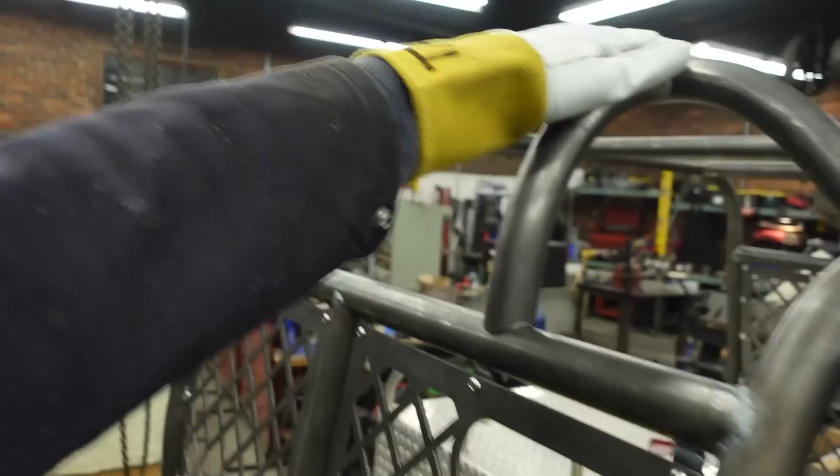All right viewers, well that's what I've been trying to get right for the past hour and a half, is this curve here, because the roof plate is gonna need 2 radii to come down and weld to. So the only opening we'll have is this area right here. This will be covered with a panel across the top, over the front, and then same over there in between those 2 pieces. So I'm gonna make sure these 2 are the same distance forward from the main hoop, tack those in, double check my measurements for the roof panel, and then we'll load a 14 gauge sheet on the plasma cutter, draw that up in CAD, cut that out.

Although, before I do that, I'm gonna evaluate the shelf situation here for the AED, the defibrillator. It'll live right here, full length shelf. Wanted to get all this other stuff in, all the stuff that I know I needed, so that now all the structure exists and I know where I can tack to and support from, or something like that.

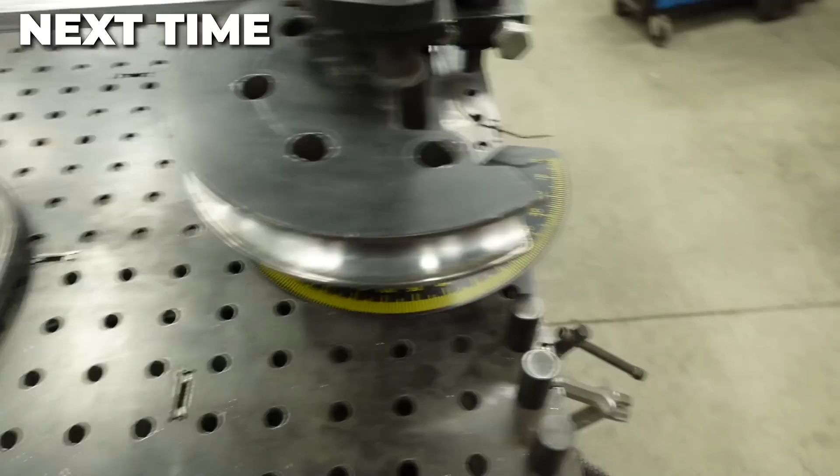All right, I'm about to misuse my bender. So what is happening here is this piece normally clamps in the pipe, but we're not using pipe. So I've had to put some spacers underneath, put some spacers on top, put a spacer here, and put a spacer here to keep that collar in the right spot. Because if it moves up and down, it might tilt the tube this way. And now we will lock this down.

Doesn't like it, doesn't like it, doesn't like it.